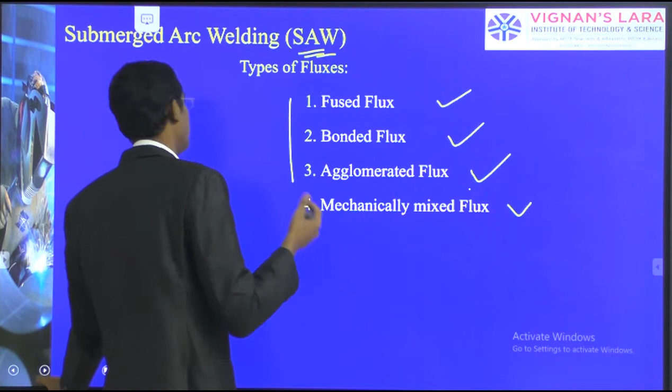When melted and slow cooled, it becomes completely solid. When it is immediately quenched, point by point nucleated granules are formed. These are crushed and used as dry granules in the SAW process.

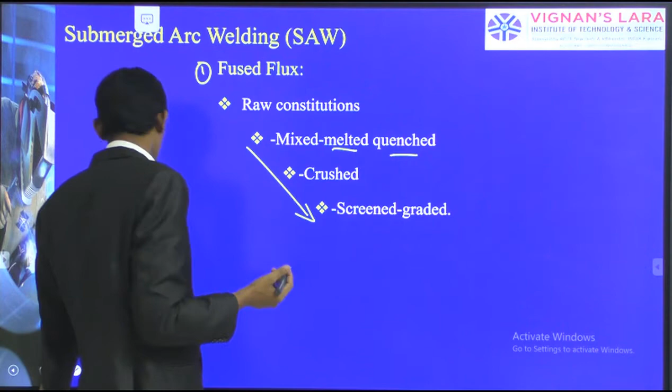The second method is the bonded flux. Here we take the raw constituents, all in powder form, and mix them dry. Then they are bonded using sodium and potassium silicate as a binder, using wet mixing. When mixed with sodium and potassium silicate, it becomes bonded through wet mixing, then pelletized, and later crushed again for finer granules. It is then screened and graded by size. This is the path of preparation of bonded flux.

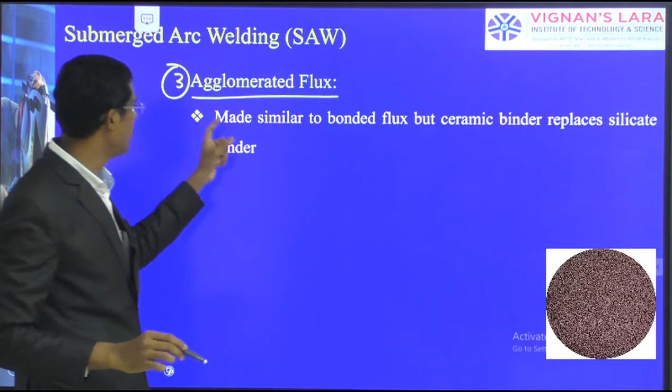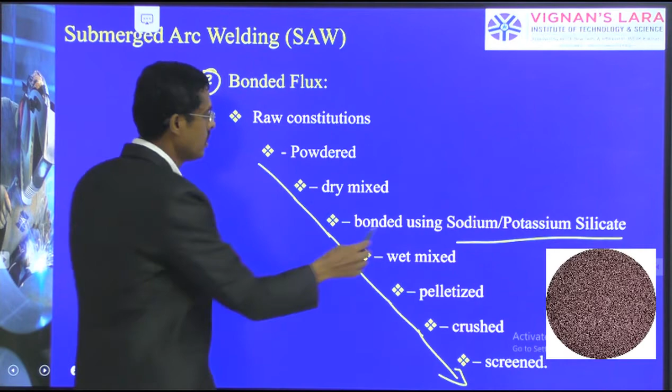The third one is agglomerated flux, made similarly to the bonded flux, following the same method. But here, a ceramic binder is used instead of the silicate binder. Earlier, we used potassium silicate and sodium silicate for bonding; instead, ceramic binders are used. This becomes agglomerated flux, with the same crushing and screening process.

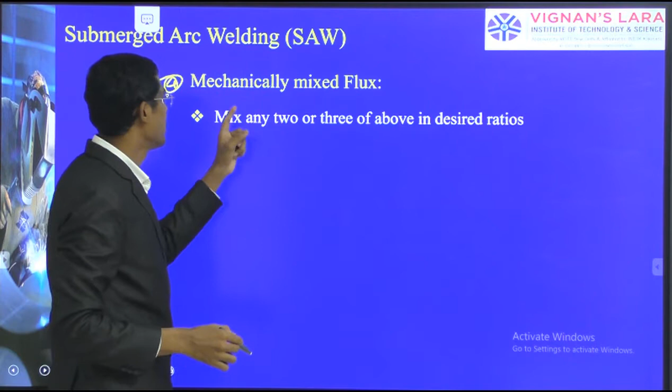Then there is mechanically mixed flux. What happens here is we mix any two or three of the above: fused fluxes, bonded fluxes, and agglomerated fluxes. We take any two from this group and mechanically mix them to get a desired ratio, such as 2:1 or 3:2. Likewise, we can mix them in various proportions.

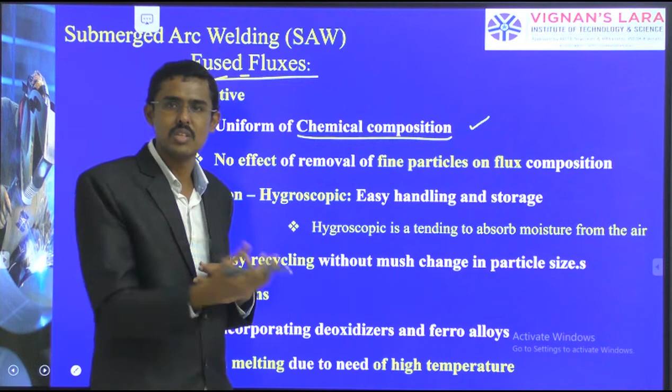So what are the positive and negative aspects? Why are there various types of fluxes? We will see one by one. Taking fused flux first: it gives uniform chemical composition, as it is uniformly mixed since it is fused point by point, melted and quenched, and crushed. Unlike binding operations which require mixing, here uniform mixing happens naturally, which is good for mechanical properties. There is no effect on removal of fine particles on the flux composition.

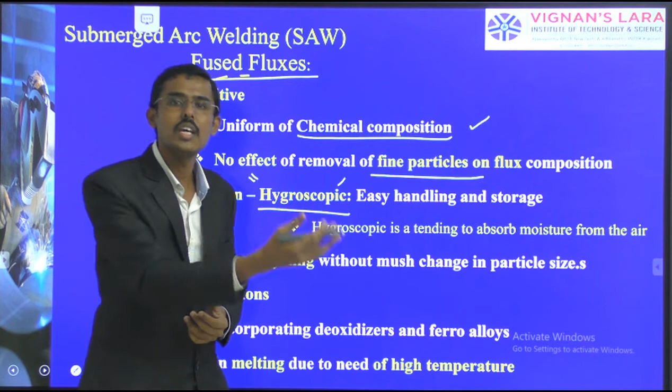Now, hygroscopic is a very important word, related to easy handling and storage. Fused fluxes, after drying, do not have the property to absorb moisture from the environment or air. Hygroscopic is the tendency to absorb moisture from the air, and this tendency is not there in fused flux, which is why it is called non-hygroscopic. If moisture is not absorbed, wetness will not come inside; if wetness is there, hydrogen will come, and hydrogen embrittlement will occur. Therefore, this non-hygroscopic property is a very important point for using fused fluxes in cases where such properties are needed.

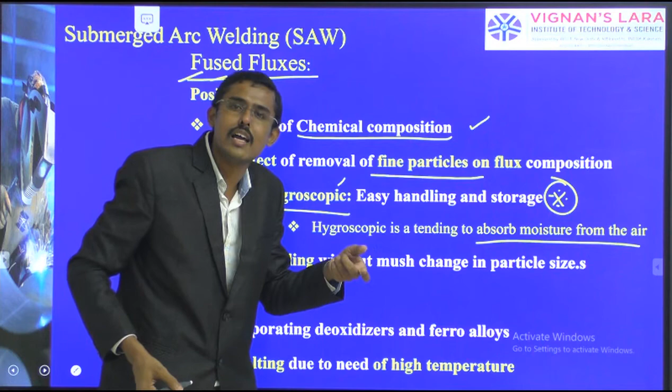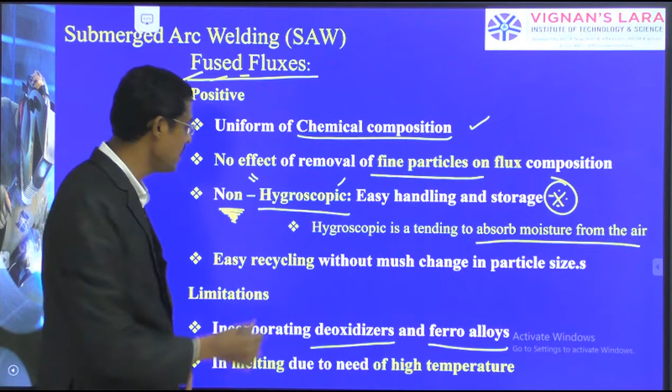Easy for recycling, but few limitations are there. Incorporating deoxidizers and ferro alloys are needed. Some oxidation will happen, so deoxidation needs to be added in the flux itself. In melting, due to need of high temperatures, this fused flux also needs to melt at high temperatures only.

So next one, the bonded fluxes. Easy to add deoxidizers - here it is difficult. Incorporating ferro alloys is needed, but it is easy to add deoxidizers and alloy systems are very easy here. Bonding, one-to-one mixing and bonding allows a thicker layer of flux - this is one of the advantages.

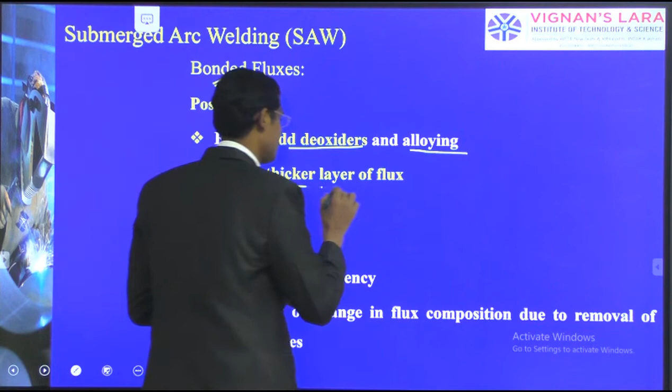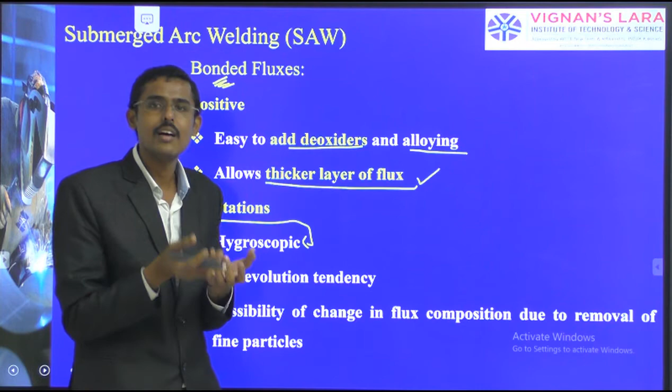Limitations - hygroscopic. What is hygroscopic? Tendency to absorb moisture. These bonded fluxes have the tendency to absorb moisture. When exposed to air, it becomes wet. If it is wet, hydrogen embrittlement automatically comes into the picture, so this is one of the disadvantages.

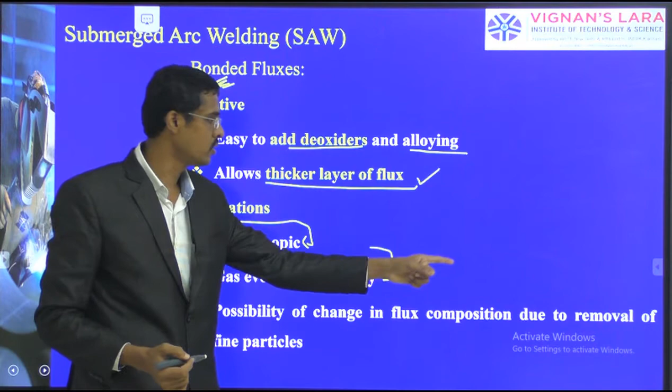Drying, warming, heating, baking are to be done here. Gas evolution tendency - if hygroscopy is there, hydrogen gas will form. Gas evolution and embrittlement, these points are interrelated. There's also possibility of changing flux composition due to removal of fine particles, so this changing becomes difficult.

So the third one, agglomerated flux, made similar to bonded flux but with a similar ceramic binder. So similar properties as the bonded flux - it means hygroscopic tendency will be there in the agglomerated fluxes too.

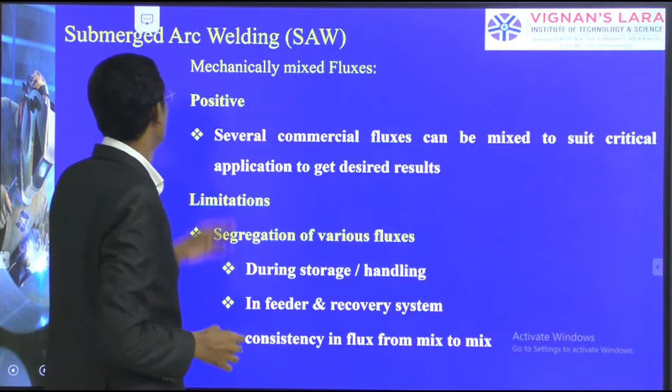So mechanical mixed fluxes, the last one. Several commercial fluxes can be mixed to suit critical applications to get desired results. What we are doing - we have taken the bonded, the agglomerated, or the fused flux and mixing them. Therefore we get two properties: here some hygroscopic tendency will be there, there is no hygroscopic in the other, and some efforts will form. Those will be helpful for some critical applications we are using.

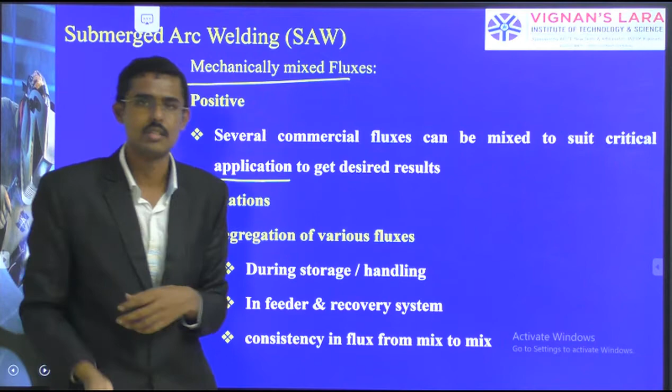So limitations - segregation of various fluxes. What is this? Segregation is nothing but occurring in the grain boundaries. Let us consider this is the grain boundary - here, few alloy systems will form in between the grain layers. This segregation forms during the solidification process.

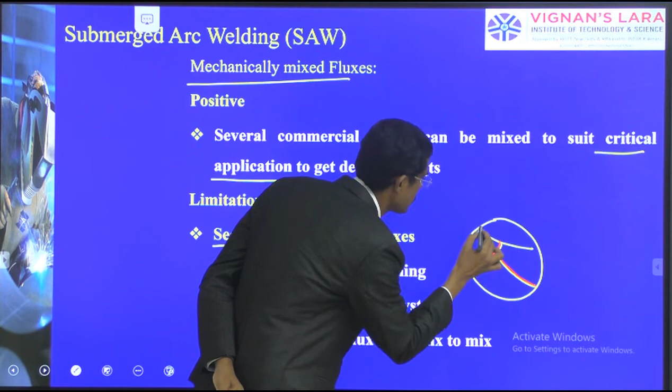So the segregation, if not permitted to move back, will deteriorate the properties, decreasing the property - fine grains will not form. If it is segregated in the boundaries, how will the next layer form? Next grains will attach with the previous one and strong bonding will not be there, therefore this decreases the property of the material.

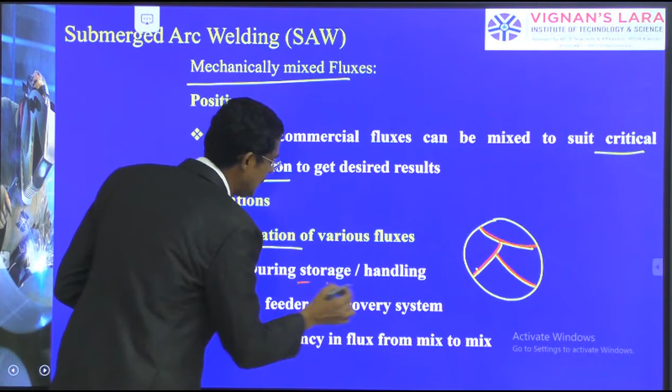So during storage or handling, this will occur, and also in feeder recovery systems, where segregation happens. The segregation may happen during storage, during feeding with respect to attachment to the environment, and also consistency in the flux formation of one-by-one mixing properties.

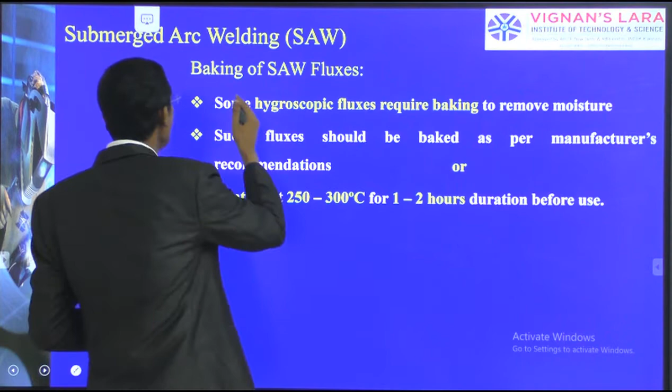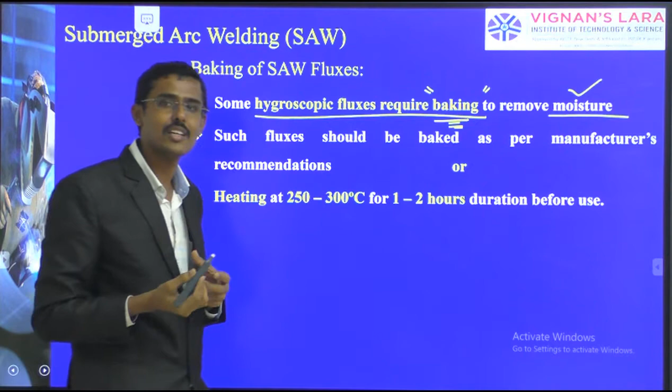So you can see the baking of the SAW process, how we should do it. Some hygroscopic fluxes require a baking process - because of the hygroscopic absorbing tendency, it should be removed first. Therefore it should be baked to remove the moisture. Yes, it can remove the moisture, and such fluxes should be baked as per the manufacturer - how much temperature it should be baked before implementing to the industry.

The supplier or manufacturer will give the manual, or otherwise in general they recommend heating up to 300 degrees centigrade for 1 to 2 hours in the oven, and we can take it from there. So that methodology we can follow.

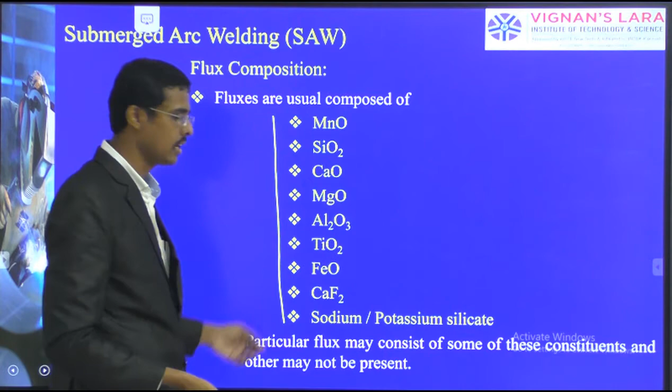So flux compositions - what it usually contains for the alloying system. I am telling this as various alloying systems can be added for improvement of the properties. So silicon, aluminum oxide, titanium oxides, iron, sodium and potassium silicates are there. So these various components will be included as binders or for improvement of the properties.

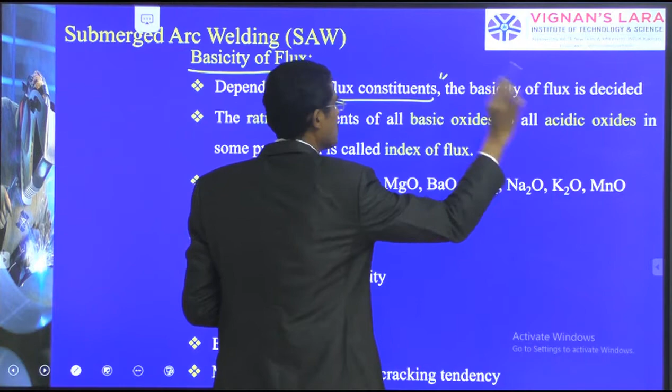Now we are defining one terminology - basicity of flux. What is this basicity? Depending upon the flux constituents, the basicity of flux is decided. It is a ratio of the content of basic oxides to the acidic oxides - the ratio of basic oxides to the acidic oxides.

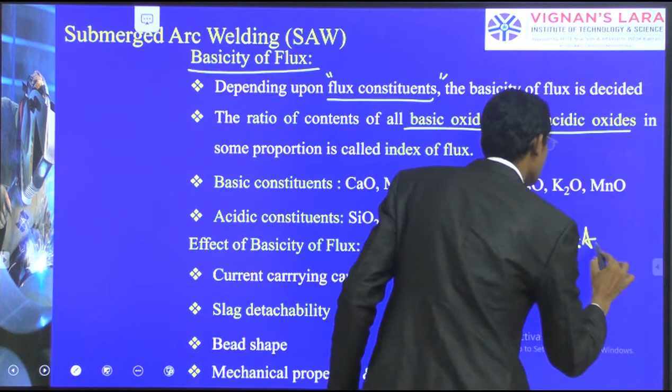How much it is there, whether 1:1 or 2:1 or 1:3 - likewise some ratios are there. Based upon that, we are forming the basicity of flux. Whether it is low, it gives some property. Whether it is high, it gives some property. We will see the property in the next slide.

So, what are the basicity of flux? Here we have given a few examples, and acidic constituents we have given a few examples. Silicon oxide, titanium oxide, aluminum oxides come under acidic constituents. So this combination makes it equal, higher or lower. Depending upon that, the basicity

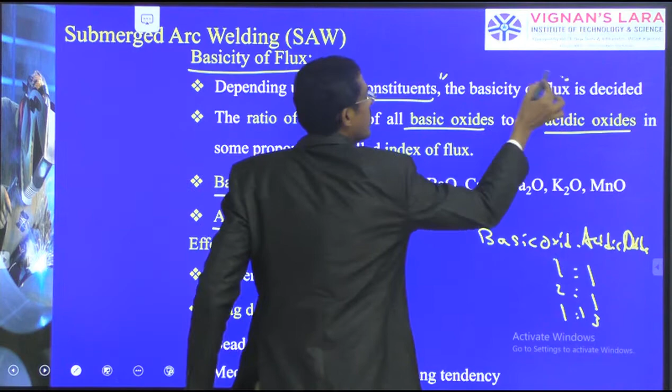increases or decreases. So what are the effects? The current carrying capacity, slag detachability. This basicity decides the current carrying. The flux, as I already told, when we are adding iron powder, it carries the current along with the bare wire. Likewise, how much current carrying capacity it is having - high or low.

So slag detachability - slag will form, we know this. After forming the slag, it has to be removed. It cannot be used as it is. For removal we need easy detachability, not fixing. It is not fixed, not bonded, not welded, but it forms a layer. That layer has to be removed. So easy detachability should be there - easy or hard.

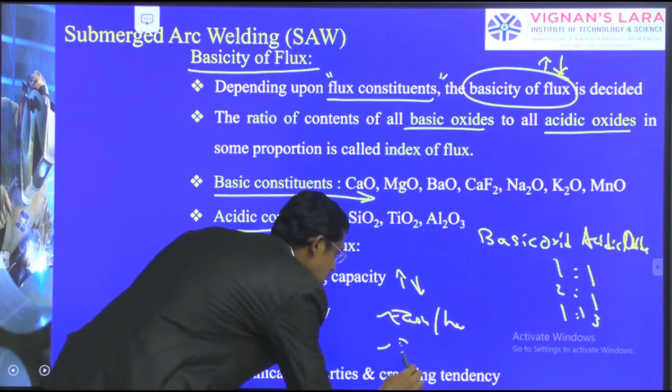Bead shape - it is neat or smooth or non-smooth, easy or hard, bead shape smooth or how - all this is defined based on this basicity of flux, based on this composition ratio. So that is what I have given here.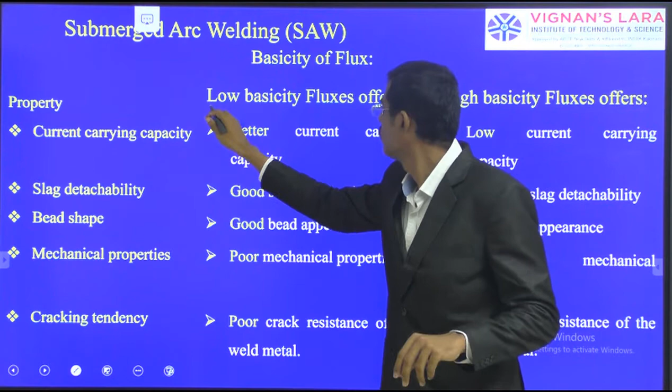So I have taken two options - low basicity and high basicity. What happens? For the current carrying capacity, on low basicity there is better current carrying - it has better current carrying capacity. But similarly, for high basicity we have low current carrying capacity. It means if basicity is high, current carrying becomes low. So that combination you should understand.

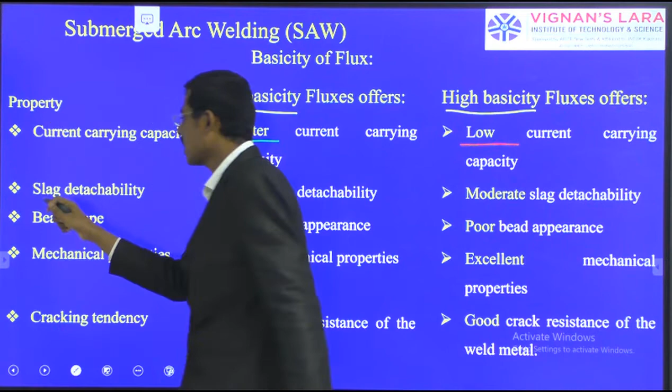Similarly, I am talking about slag detachability. Normally we define what is slag detachability. What about the property here? It is good - it is a good slag detachability. Then the bead shape is good, bead shape appearance is good.

But here you see the mechanical properties are reducing. But there we have excellent mechanical property - we have excellent mechanical properties there. So you can tell excellent mechanical property.

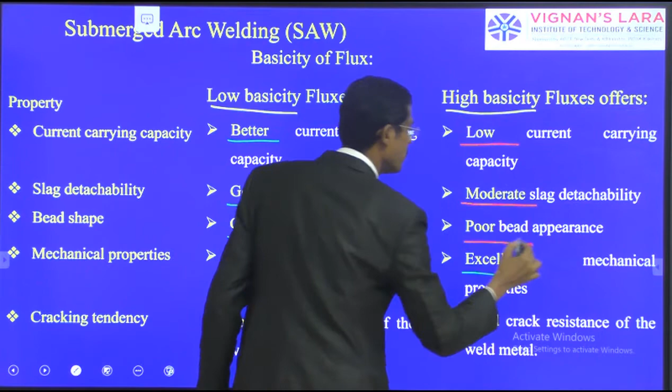So what are the other conditions here? Moderate slag detachability, poor bead profile - this opposite is forming there. So here also poor cracks, but there it is good crack resistance - good crack resistance is there.

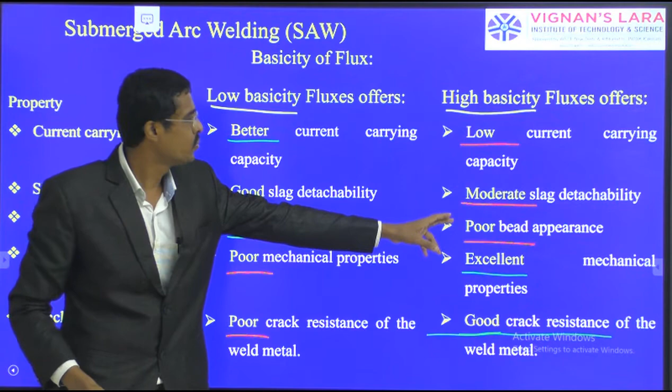So what do we need now? We need good mechanical properties - excellent mechanical property we need. Poor bead profile, moderate slag detachment - we should consider these factors. Finally, we should select whether it should be high basicity index or low basicity. Accordingly, we mix the alloying system - fused, bonded, agglomerated, mechanically mixed. So such things we are doing.

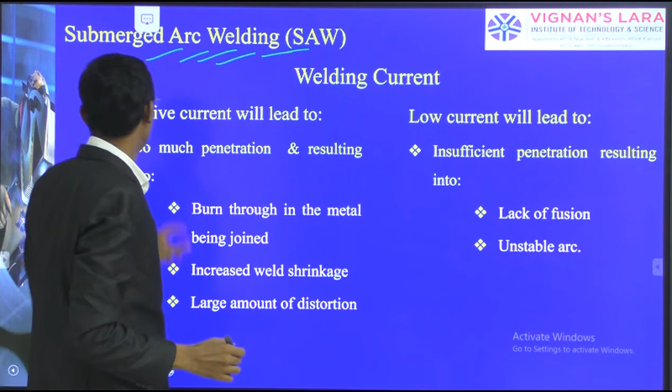So welding current - the next factor we should see about in the shielded submerged arc welding process is about the welding current. If it is too high, excessive current we are using, what happens? If low current we are using, what happens? So too much penetration results - if high current is there, high flow of electrons will be there, high heat generation will be there, therefore high penetration will form.

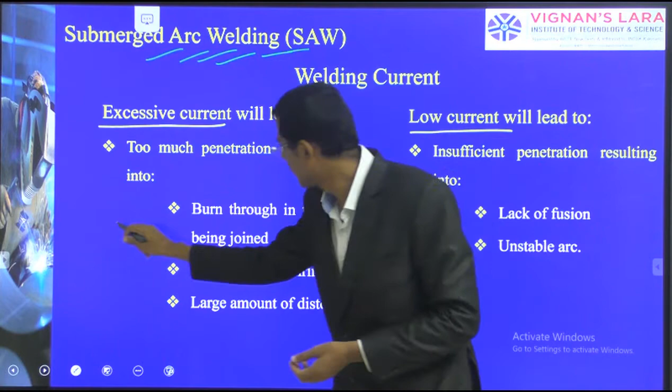More can be welded here. High current, high penetration, therefore more we can go and weld - full penetration, named as full penetration we can do. But some other points are there.

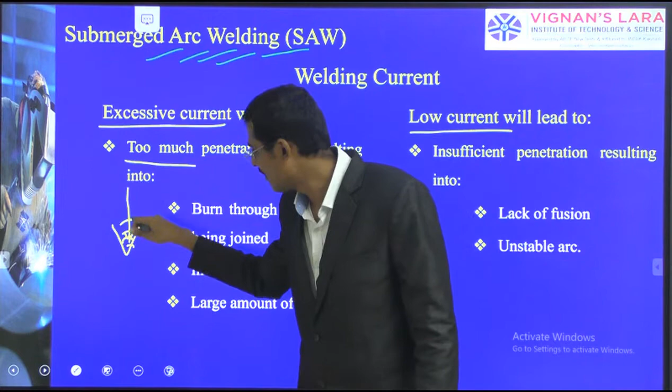What happens if it is too high? We are not talking about high current, we are talking about too high current. What happens? Burn through is possible. It may come after welding - the required thickness may come down. That is totally bad. So burn through will happen.

Increased weld shrinkage - much more heat, it shrinks, the distortion will happen. That also is one of the possibilities. Large amounts of distortion are possible there.

So when I am giving the optimum current, instead of optimum I am going with too high, or I am going with too low. What happens when too low? Insufficient penetration.

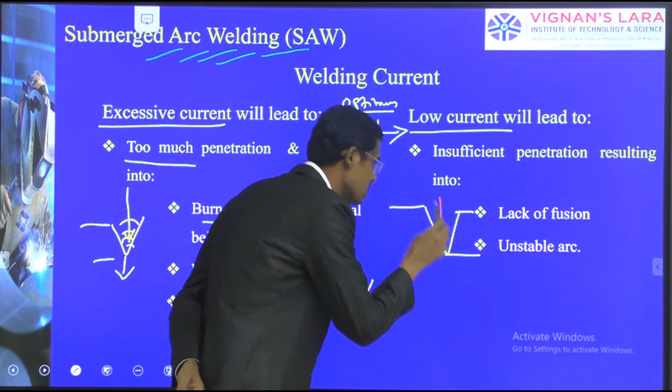What is this insufficient? Here it is the V groove, and here the total length we have to weld. It is the total length we have to weld, and I am welding - this reaches up to this condition only. It is not melted. Then how will it reach the root? It is not done, so welding stops here itself. So here is the gap which is not melted.

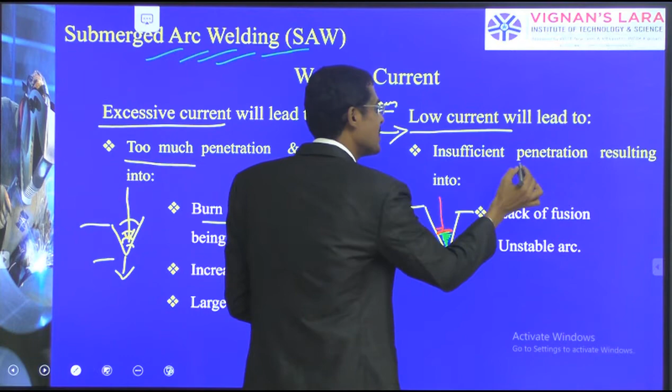Insufficient penetration will happen, and also lack of fusion. These two words are related - penetration and fusion - it is not heated, not melted. Then when the two members A and B join, lack of fusion will be there, and an unstable arc. Current is found unstable, fluctuations will happen, it is not joined, arc is not generated properly.

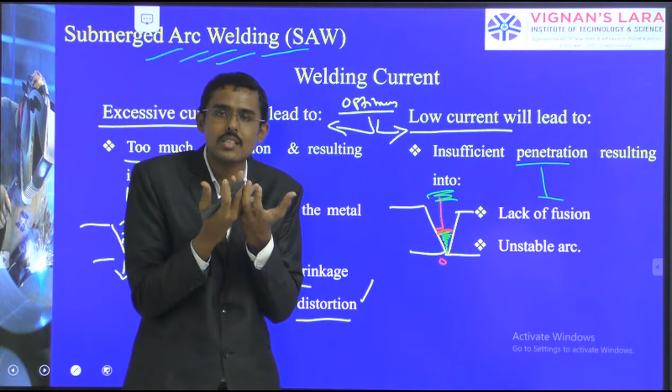It is not good. I have taken a few examples of increased welding current here. I am welding from one direction to other direction, increasing as I go.

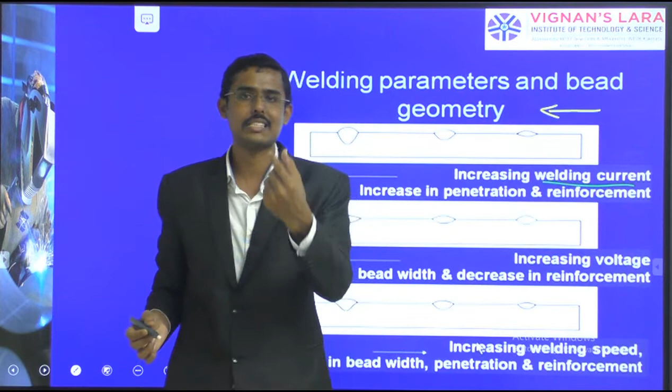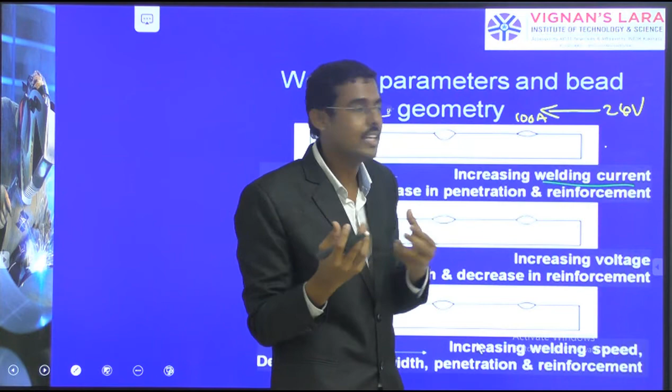So when the welding current is low, let us consider 100 amps we are giving, number 1, with a constant voltage of 26 volts. When 100 amps is given, this is a possibility - it is low. But the required level is 120 amps to be given.

When the current is increased to 120 amps, the penetration increases - from here to here, the penetration increases. Now I am increasing 120 to 140. What happens? Again, depth of penetration increases. Increasing the weld current increases the penetration. That is the point - current increase, penetration increase.

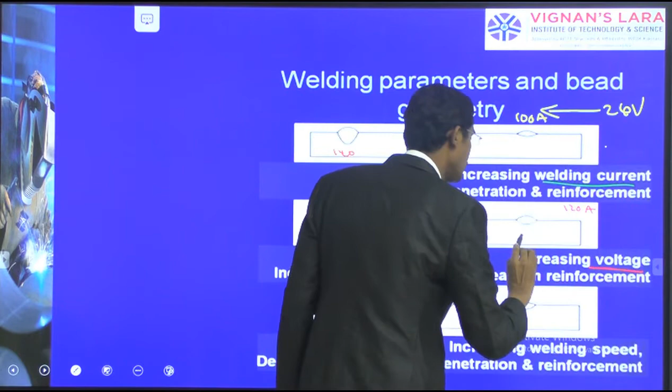Now I am not increasing the current, I am increasing the voltage instead. Instead of 24 volts, I have kept 120 amps as constant and I am varying the voltage. Here I am giving 22 volts. What happens? It is minimum. The required is 24, but voltage is not given sufficiently.

The pushing of electrons does not happen. Then what happens here? It is not reaching the penetration level, but it is reaching somehow to the broader level. So here, when I am giving 24 volts, this widening of the weld bead happens.

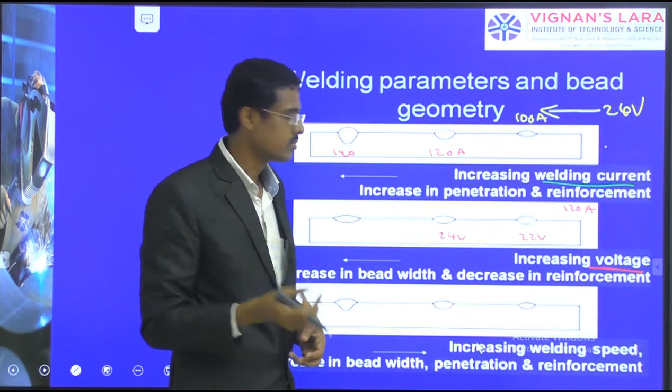Now I am giving 26 volts. What happens? It even increases in the weld bead here. So it is small with decreases, increases with respect to voltage increases, but here depth increases. So with respect to increase in the voltage, increase in the bead width happens and decrease in the reinforcement.

That is okay. Now increasing the weld speed - three factors we are seeing here. Instead of all this, I have kept constant and I am going for increasing the weld speed. What happens? So these two are constant - now we have taken 24 volts proper and 120 amps proper, and also the heat is generated at one level.

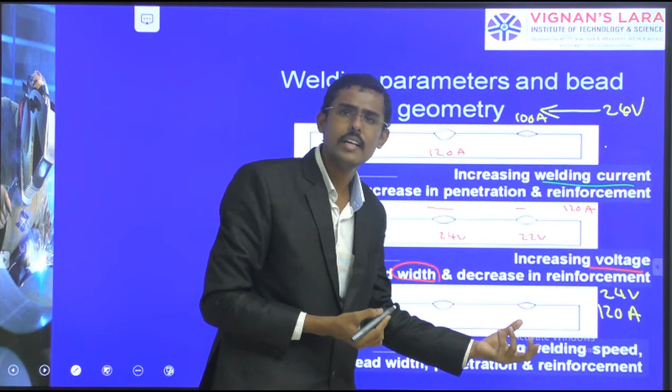But required heat needs to be absorbed by the weld metal and the electrode - then only it melts and gets deposited. What I am doing is moving the gun very fast. Then what happens? It is not sufficiently absorbed. Then the electrode is not melted, and the weld metal is not melted, and therefore we are not getting the joint increasing - penetration we are not getting, width we are not getting.

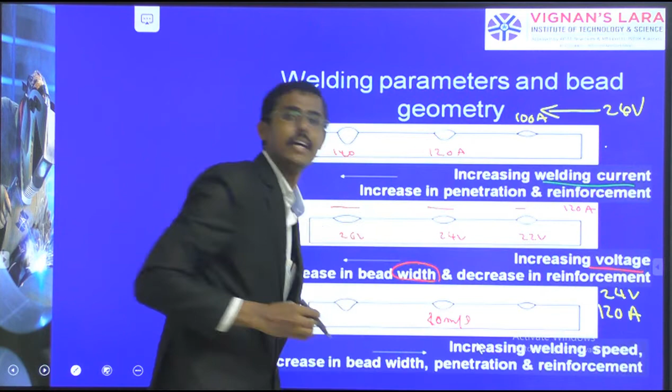So therefore insufficient welding speed here. Optimized welding speed to be given - let us consider 10 or 20 mm per second to be welded. But here we have done at 50 mm per second, going very fast. This is the optimal level we have done.

And in case I am going very fast at 50, what happens? Up to slow we are doing 50, 20, and now I am doing very slow - 5 mm per second I am moving, very slow. More heat is generated here and the penetration goes up.

Increasing the weld speed decreases the bead width. See, increasing the weld speed - 5, 20, 50 mm per second, I am going in this way. As I increase speed, automatically the penetration also decreases, and the width also - here the width is this one, here it is reduced, here it is much more reduced.

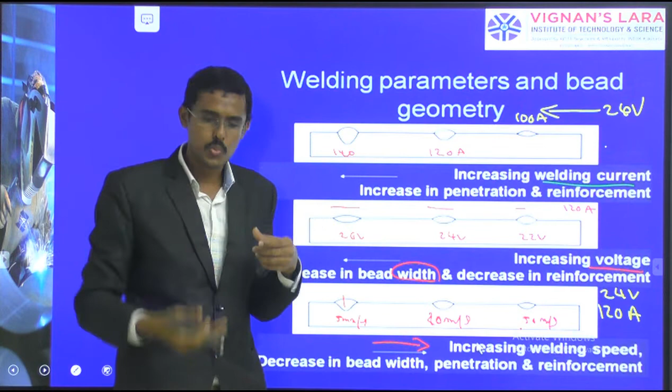Because heat is not absorbed to a sufficient level, we should give optimum speed, optimum voltage, and optimum current. This is applicable for any welding process. As current increases, penetration increases; as voltage increases, width increases; as speed increases, width and penetration decrease. Optimum values must be given — this is our understanding.

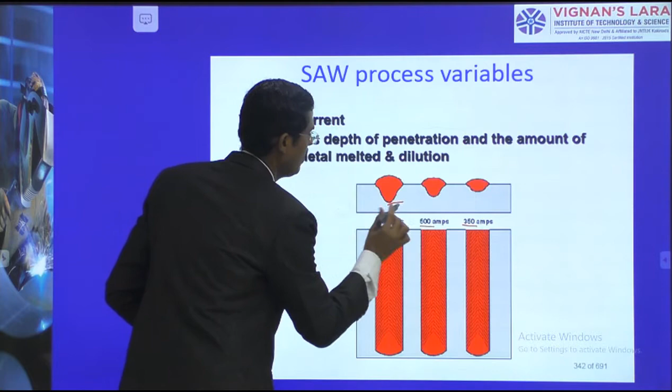So the welding current is 650, 500 and 350. As the current decreases, we know the bead also decreases and penetration also decreases. See, high current is here. When we go for low current, it keeps on decreasing, and penetration does not happen.

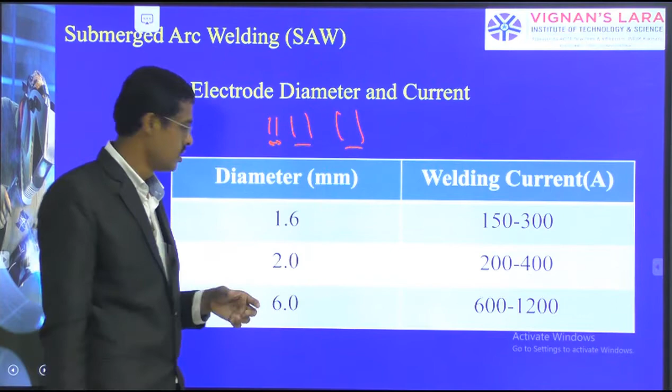Similarly for width, the electrode diameter matters. For example, for 1.6 mm diameter, you have to use 150 to 300 — it is 100 times multiplied. For a 2 mm diameter electrode, this is 2 mm, this is 3 mm, this is 6 mm. So for 2 mm diameter, therefore 100 times 200 into 400. This is just an idea; by practice it comes. You can use 600 to 1200.

Now, the selection of type of welding current. When I take direct current electrode negative, what happens here? There is an increase in the width of the weld appearance. But with direct current electrode positive, there is an increase in penetration. Which one do we need? We should decide whether it should be wider or penetrated — these things we should decide. When it is alternating current, both occur equally.

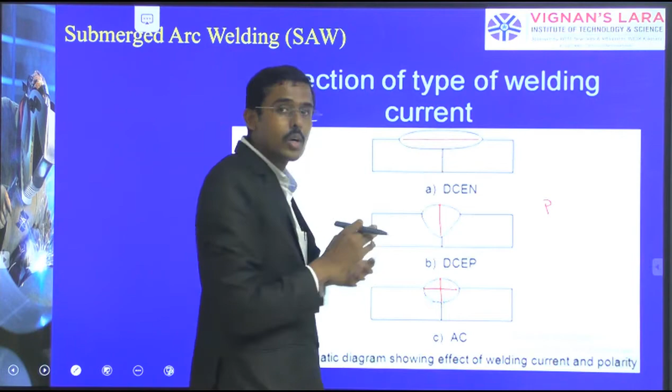In direct current electrode positive, the electrode is positive at the top, so the electrode melts and is deposited with more heat, and it penetrates. In direct current electrode negative, negative is at the top and positive is at the workpiece, so the workpiece is melted. Okay, that we understand.

Current type, whether it is positive or negative — electrode positive, electrode negative — what are we doing here? DC electrode positive, DC electrode negative. In such cases, what happens? In electrode positive, electrons go upward to the positive, melt the electrode, and come down. Therefore high heat is generated at the electrode because the electrode has to be melted — it is a consumable electrode. After melting, it comes down and generates more penetration — this is DC EP.

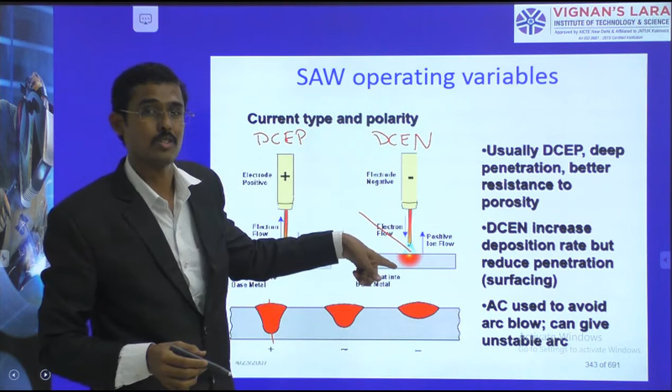But in similar cases, what are we doing here — negative heat is generated in the downward direction. What I am doing in heating is supplying one separate consumable electrode wire, like in the TIG welding process. The electrode is supplied, heated and melted. So what happens here? The penetration is less, but we can use a non-consumable electrode, maybe tungsten, in this case. Now, for welding voltages, we have seen this.

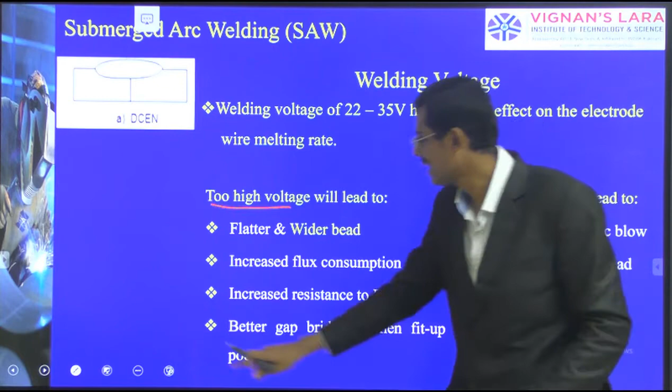If voltage is too high, what happens? A wider bead occurs. As voltage increases, a wider bead occurs — we have just seen this wider bead. And with a wider bead, flux consumption increase, increasing resistance to porosity.

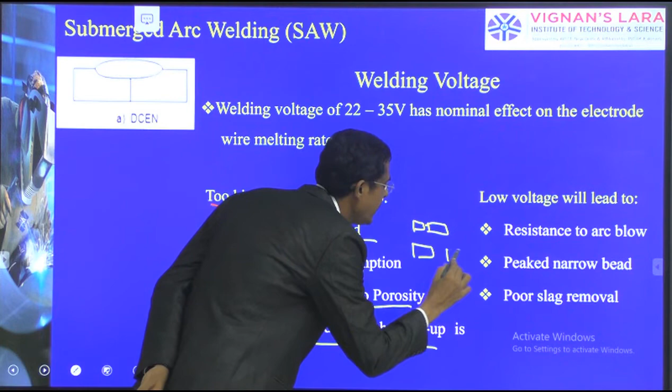Better gap bridging is needed when the fit-up is very poor. Let us consider I have to fit two components, but the fit-up is not good — the welder or fitter has not done it properly and has fitted it with a wide gap. At this time, what can I do? I can use a large diameter electrode — instead of 2 mm diameter, I can use 4 mm diameter — and then I can fill this gap.

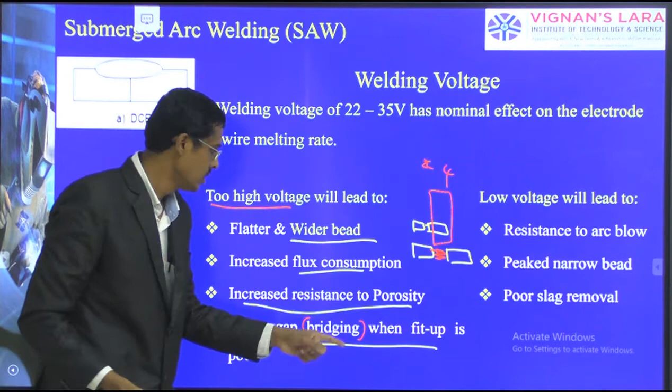This is called gap bridging, which helps when fit-up is very poor. So low voltage will lead to resistance to arc blow, similarly peaked narrow beads and poor slag removal — all of this is not good, and it should be modified.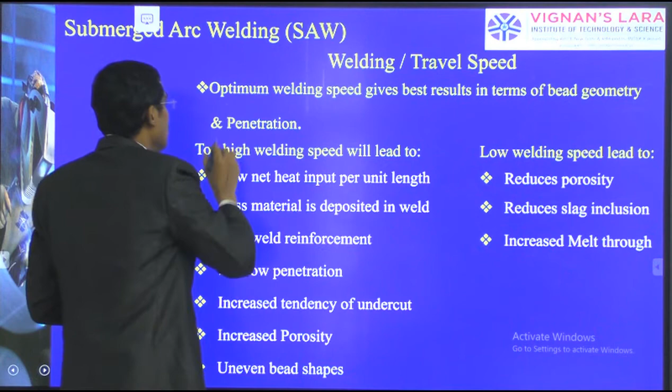So for welding travel speed, the same points apply. If it is too high, when the heat is too high, there is low net heat input per point, per unit length — heat is not generated at a specific point. Here we have to weld; at this location heat has to be absorbed, at this location heat has to be absorbed, at this location heat has to be absorbed. When I go very fast travel, what happens?

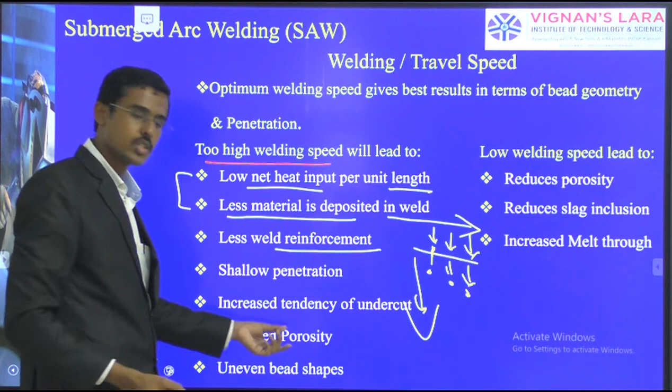Heat is not absorbed at this point, similarly not at this point, and not at this point. Low heat is input per unit length, so less material is deposited. Heat is not made, so it will not be melted. All these factors are interrelated - less welding reinforcement, shallow penetration, deeper penetration will not happen, increased tendency of undercuts, and increased porosity. All this happens when travel speed is high.

Uneven bead shapes result. First of all, it should be heated, ready to melt, ready to deposit - but that we are not permitting. If you are not permitting it to heat, you get less weld reinforcement, less penetration, less material melting - all of this happens due to high welding speed, along with reduced porosity, reduced slag inclusions, and increased melt-through.

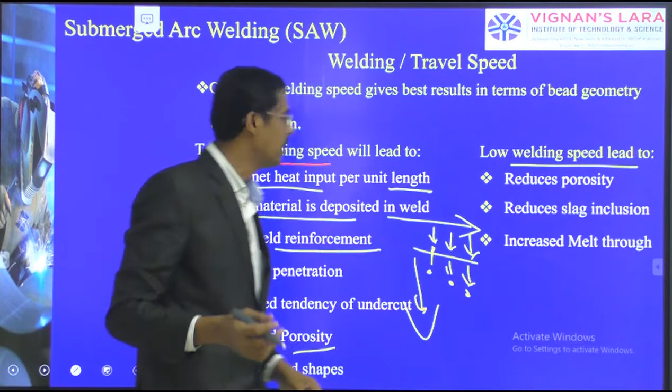We should give time. We need an optimized speed for this.

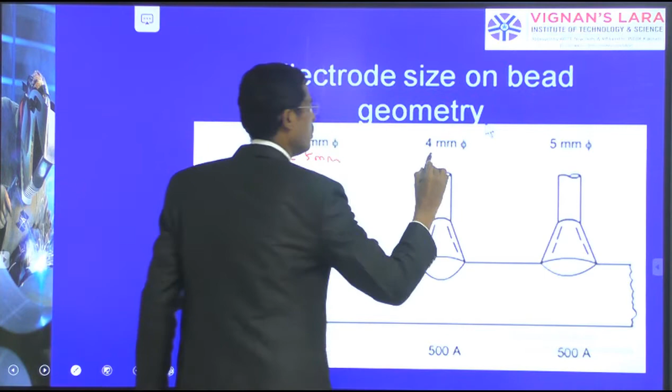So for electrode sizes, I have taken 500 amps here, 500 amps here, and 500 amps here, but with variation in diameter - 2.5 mm, 4 mm, and 5 mm. So the thickness is increasing but the current remains the same.

In such a case, what happens? The same current supplied for a small diameter gives proper welding and proper penetration. But now the same current is applied for increased thickness - it is not sufficient to melt the required diameter. Therefore, the length of penetration decreases.

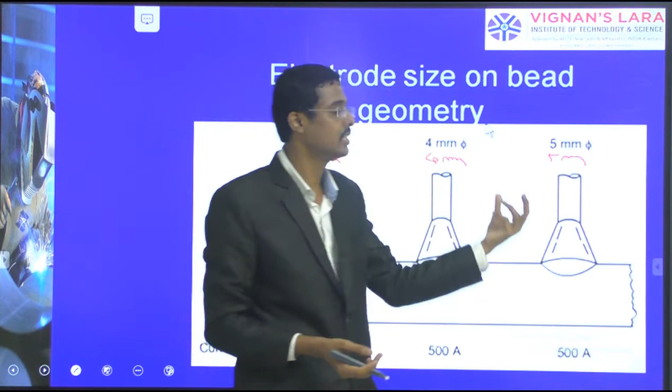Further increasing from 4 to 5 mm, the diameter increases further but the current remains the same, so it is not possible to melt as per the given current - penetration decreases again. So from the first condition's penetration, the second condition is reduced, and the third condition is further reduced. I used 2.5 mm, 4 mm, and 5 mm electrodes, all with 500 amps of current.

So an optimized current needs to be given. For 2.5 mm, 500 amps is okay. As diameter increases, here 600 amps should be used, and for 5 mm, 700 amps should be used.

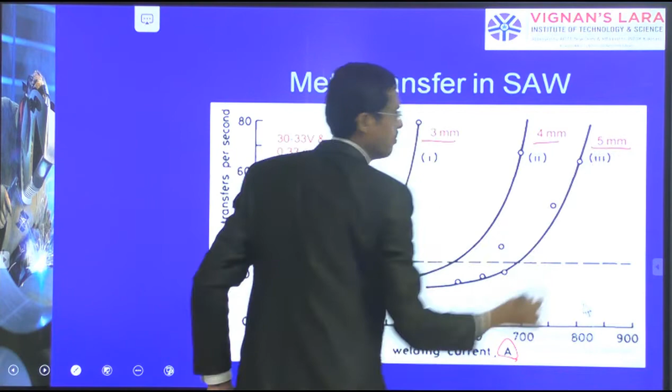So how does metal transfer happen in SAW? You see here, welding current is increasing in this direction with respect to 3 mm, 4 mm, and 5 mm electrodes. So the same point I explained is reflected in the graph format.

For the 3 mm electrode, you can see the number of transfers - I'm talking about how many drops are melted and deposited. It's about 50 drops.

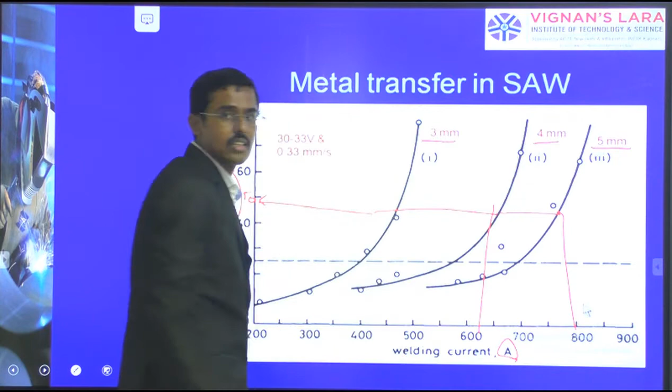Obviously optimized current and filler wires must be matched. Here I have taken a 3 mm electrode, here a 4 mm electrode, and here a 5 mm electrode.

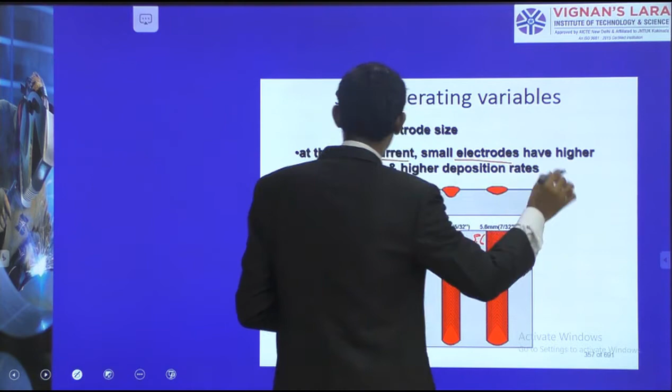What happens when the thickness of the electrodes increases but with the same current and same voltage? You see, at the same current, small electrodes, there's higher current density and higher deposition rates - it keeps increasing here, but keeps decreasing in this way compared to the first one.

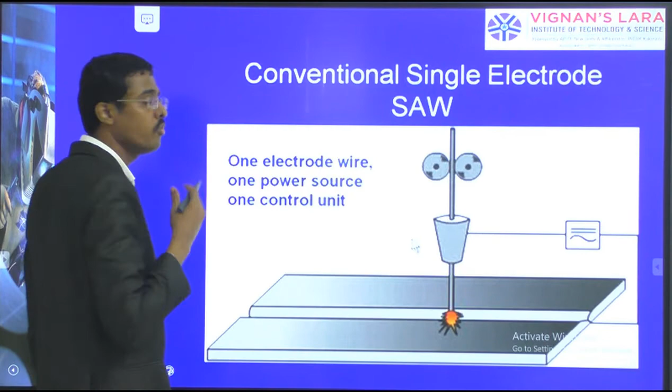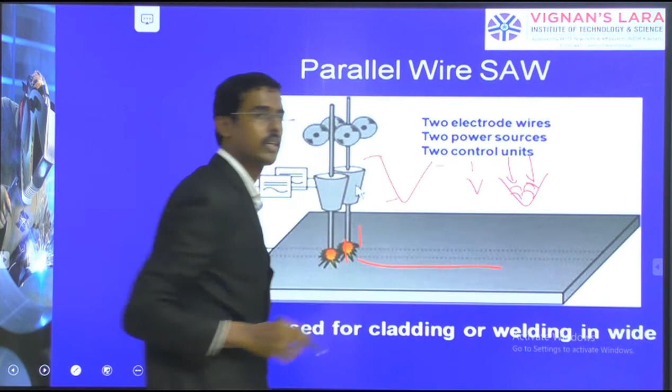So this is the falling characteristic of the wires. We may use a single filler wire in submerged arc welding, or we can use double fillers if the thickness is wider. For small thickness we use a single filler; for large thickness we use the double filling method. Such things we can do in submerged arc welding processes.

As for electrode extension, where the electrode extension increases, the penetration also decreases.

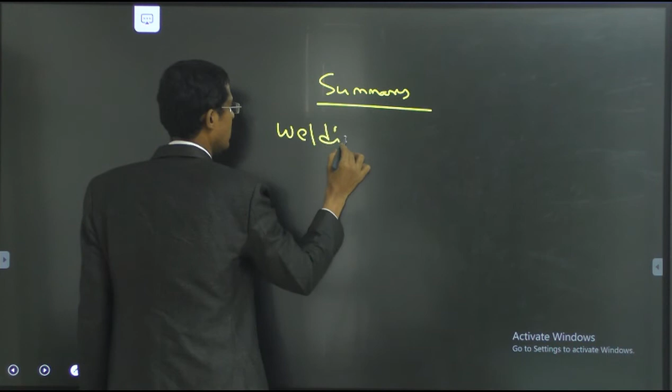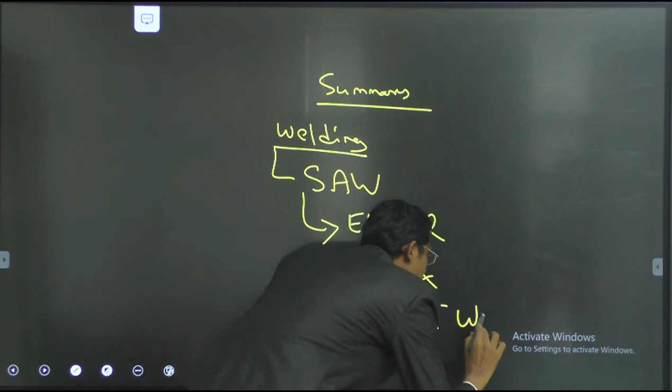The summary: in welding, today we have seen about the submerged arc welding process. In that, we covered the electrode, the fluxes, and then current, voltage, welding speed, and other factors, and how they relate to the welding process. We will see the remaining part of the subject in the next session. Thank you.